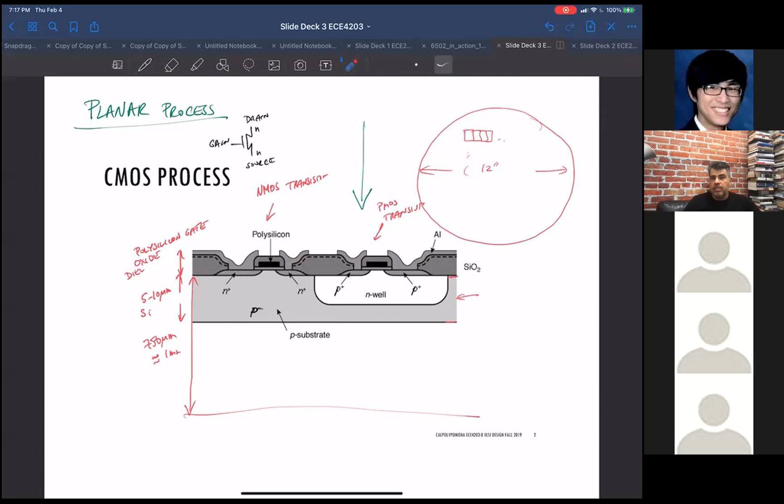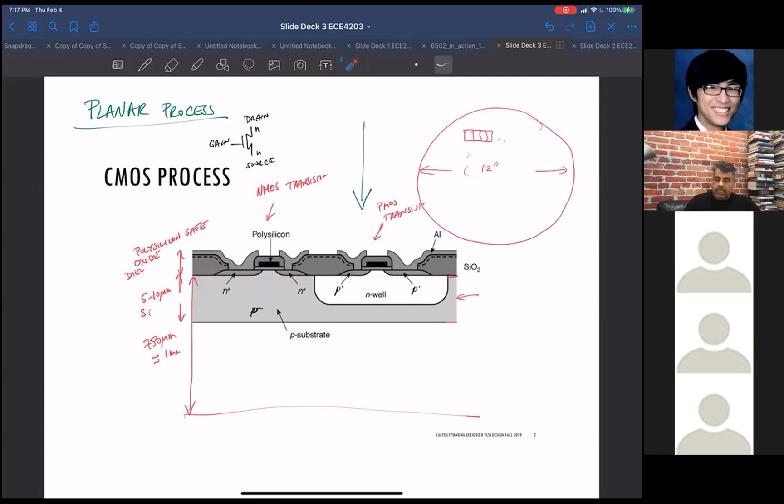Anything above the surface is almost entirely put there by deposition. You deposit a whole layer of aluminum or copper and pattern it—you deposit it, pattern it, then put a layer of dielectric above it to isolate it from the next layer of metal, and so on. So it's almost like divided in half: this is the surface, everything below is silicon, everything above is not silicon, except the gates, which are polysilicon—that's an exception. So I'm being a bit general, but everything above is basically metal interconnections and so on.

Okay, so let's talk a little bit more about this process. Maybe it's just saying the same things again—let me take a look at my notes here.

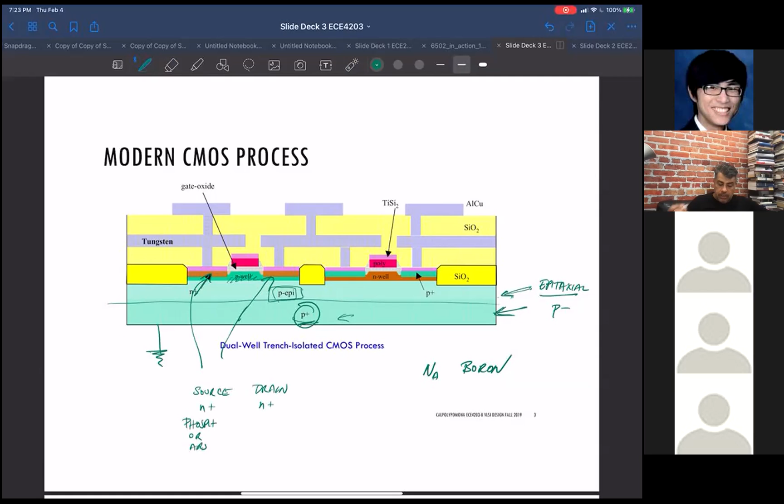So then you put in this N plus - this is not the sequence you do it in, I'm just describing the different components here. So you have your source and drain for your NMOS transistors. Again, those are N plus, which means highly doped with donors. Those tend to be phosphorus or arsenic, which is what they dope it with to get this heavy concentration of electrons.

You have a gate dielectric, which is silicon dioxide, and then you have an actual polysilicon gate. So this is your NMOSFET schematic drawing. You have your source, your drain, and your gate. This gate is polysilicon sitting above your substrate, and the source and drain are these N plus doped areas in the silicon.

So simultaneously then you're also building up P transistors, because it's a complementary MOS process. You have both N type and P type.

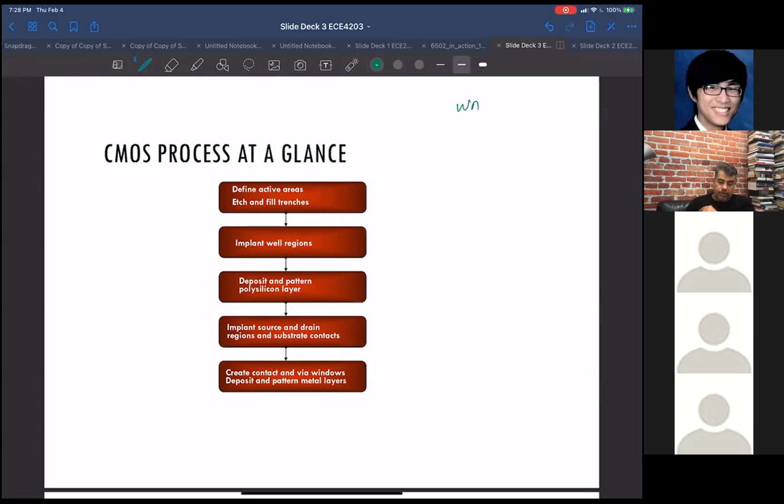And that's called a lot — a wafer lot. Depending on which foundry you're in, a lot could be 12 wafers or 24 wafers. And those wafers in that lot are all sort of traveling together, and the same thing happens to all of them. So those guys are all moving from station to station and getting worked on. By getting worked on, it's all happening automatically by these machines, and they're doing these steps to these lots, and then other lots are moving through.

So essentially, at a very high level, these are the steps that kind of happen to these wafers. The first steps happen just to the silicon itself. Remember when I was saying that when you're below the silicon surface, it all has to do with implantations.

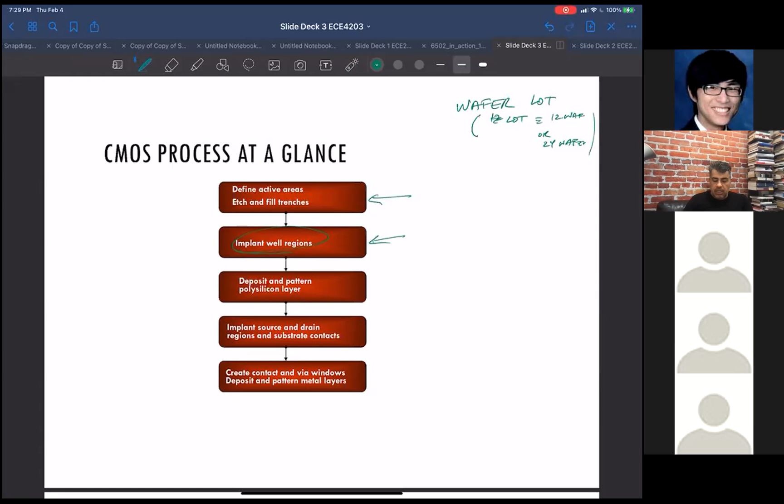So you have these implantations, which is a way of adjusting the doping concentrations, etc. One thing I should have mentioned better: because of different reasons, which we might go into, you have NMOS and PMOS in the same substrate. They are isolated from each other by the N-well of the PMOS, but for reasons we probably won't get into, you'd like additional isolation.

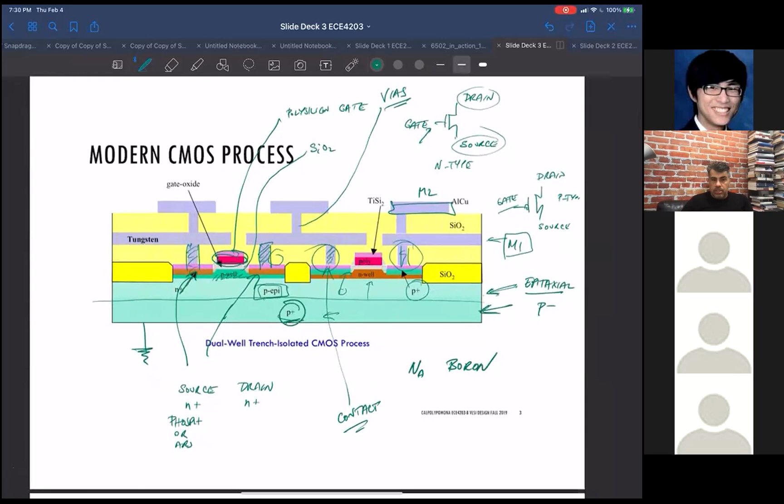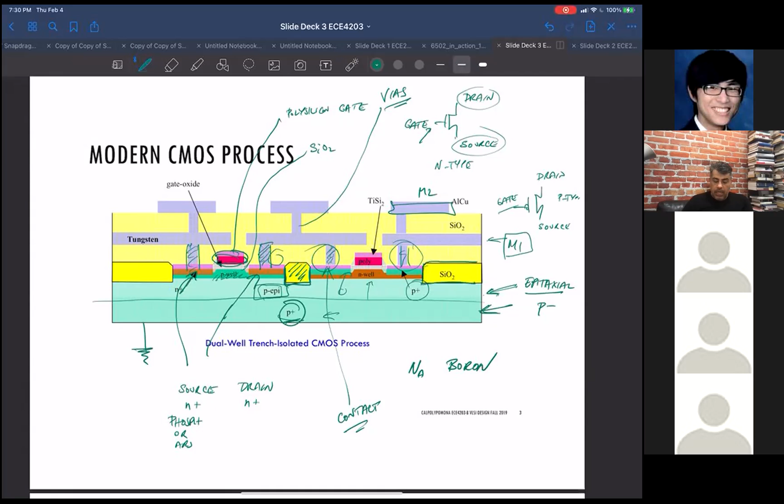So what you do is you actually etch the silicon and fill between the transistors with some dielectric, typically silicon dioxide, and that is an isolation between the transistors. So that also happens at this top part — you etch the silicon, and that isolation is called a trench. You fill it with some dielectric, probably silicon dioxide, but it could be something else.

Okay, so this is all stuff that's happening that's putting in the sources, and this is the first step — the isolation, sources and drains of the transistors, substrate contacts. So that's kind of what happens here.

The next step is you deposit and pattern the polysilicon layer. The polysilicon is the gate of your transistor — so this is your gate.

Okay, we'll see why this is the case. After you put in the gate, you will adjust the doping of your source and drain regions, and substrate contacts. After that, you put in the connection between metal layers and your sources and drains and your gate, or additional metal layers and the connection between those.

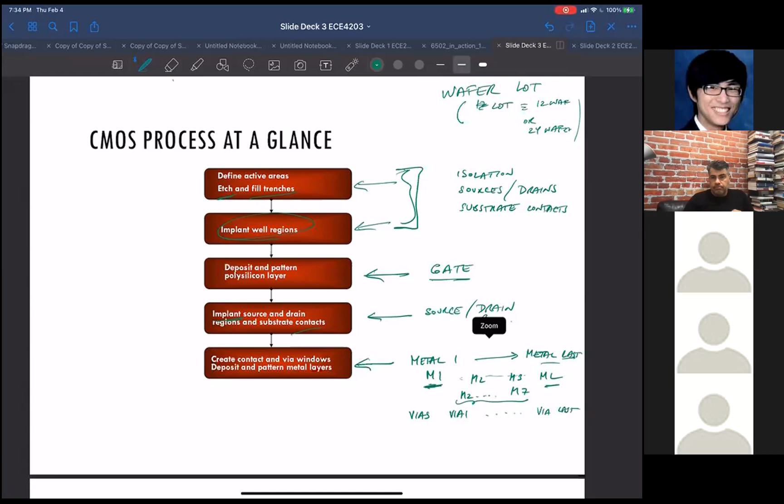Okay, so this talks about patterning. It keeps talking about patterning, because when you're depositing something on the silicon, you're depositing it the same everywhere. Once the machine is doing doping or deposition, it's doing the same thing to the whole wafer. But we actually want different parts of the wafer to be different, depending on whether we have an NMOS or PMOS transistor, or a metal of a certain shape on one side or another — that's what makes our design. So it's not just one uniform piece of N plus, P plus, metal 1, or metal 2.

So you go through this deposition or doping process, and then you go through patterning, where you're actually adjusting the shapes. Now, the only control you have is adjusting the shape of the thing from the top. When you look at the wafer, or the silicon chip, from the top, you can adjust those dimensions. If I'm looking at a piece of metal from the top, it'll look like this, say. I can maybe make it wider, I can make it longer. But in a CMOS process, I cannot change its thickness.

That's set by the process. So all I can do is play with the geometry in the plane of the silicon. I can make the width and length of a metal layer wider or longer, pretty much as I want within some design rules which we'll see, but I cannot adjust the thickness.

They will not let you do that. You cannot adjust — well, you can adjust how big this drain region is going to be, or the source region, or what this gate is going to be, but you cannot adjust the doping concentration. That's set by the process. You cannot adjust how deep this doping will go — that's also set by the process.

You can adjust where this contact will go. You can put it wherever you want within the design rules, but you cannot modify the shape of that contact, or how thick it is, or anything like that. So all you're basically giving the foundry is these drawings, but it's only the geometry you can modify, as a two-dimensional geometry for each layer. Any questions about that?

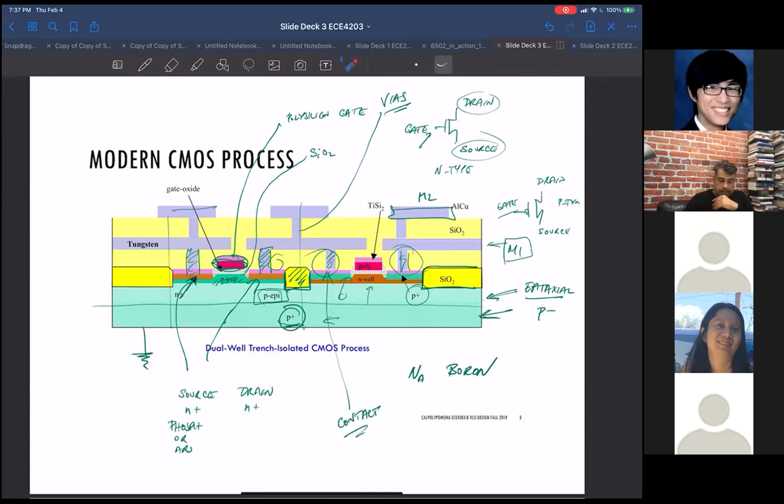That's, by the way guys, I think just as an aside, the last couple of semesters we've been kind of screwed because of various reasons. Once we're not on campus, we don't have access to these computer-aided design tools, and those are very important for doing VLSI design. Like I mentioned, Dr. Olson and myself are trying to somehow get those moved into a way where you can have access to them from off campus, but there's all these issues we're trying to sort out. I don't know if it's going to happen. I can't say I'm optimistic.

So without those computer-aided design tools, it's especially hard. The part that's really hard to visualize is this physical implementation of these layers. We can draw these drawings all we want, but besides using the computer-aided design tools, it's a little hard to visualize.

So I apologize. Because of that, some of what I'm saying makes it hard to understand, but it is what it is.

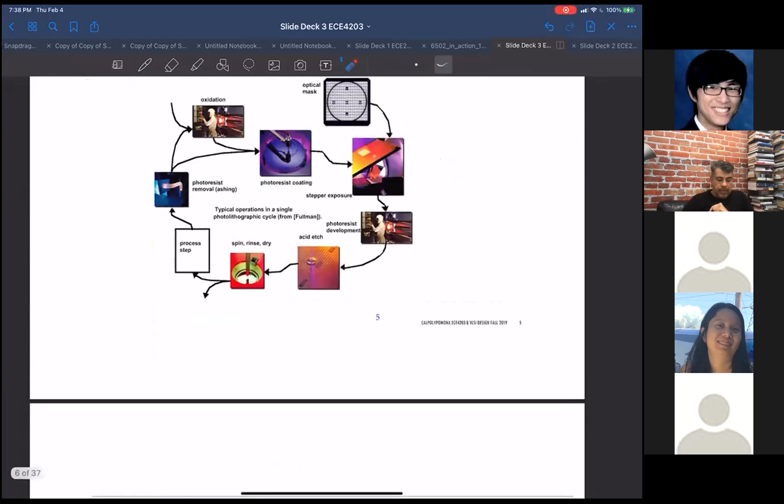So we're doing this patterning of these masks, these patterns. How does that patterning work? That patterning works with a process called photolithography. Let's say I want to shape my metal one in a specific pattern that represents a certain connectivity I want. Let me first describe it, and then we'll step through this.

The first thing you do is you spin on a material called photoresist. It's sort of gooey, liquidy material that actually gets spun on the wafer. It's very soft at this point.

It's called photoresist because if you illuminate it with specific wavelengths, the part that gets the light gets hard. So instead of being the soft, gooey, watery material, it actually gets stiff. Only the parts exposed to the light. It's also possible for it to be the opposite polarity, so the light hitting it makes it softer, but it's easier to think of it as one way: when it gets hit with light, it gets harder.

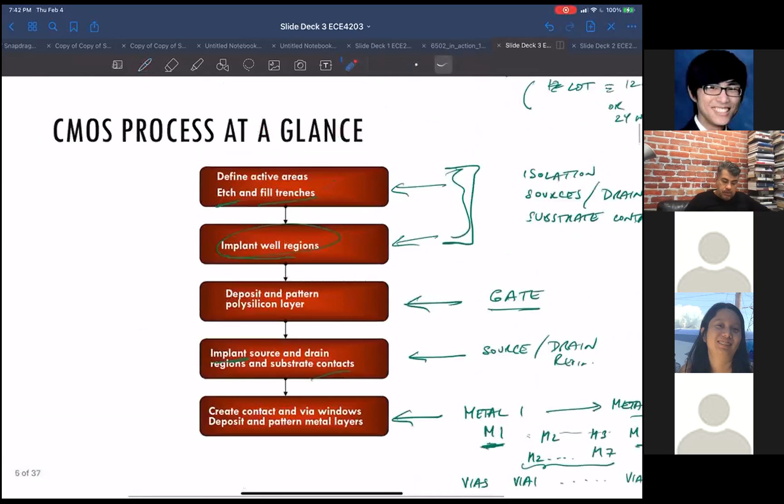Okay, let's walk through that info. I'm going to explain the same thing now with the help of this chart, which talks about a particular step in the process. Let's say we're talking about creating these oxide barriers, or isolation layers. This is done at almost the very first step.

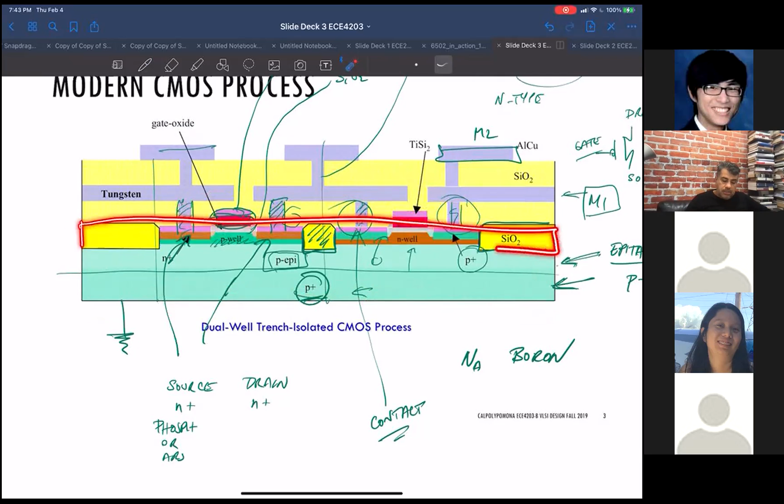What you do is, the same thing happens to everything on the wafer. Imagine at this point none of the stuff's here, you just have the silicon. The first thing you do is deposit this thick oxide everywhere. We're just going to look at that first step and see how it works. So you have silicon, and the first thing you do is deposit oxide everywhere.

Then what you'd like to do, like I mentioned, is protect some areas of this. Let's pick green for this, which is the photoresist. So I want to protect some parts of this oxide.

Okay, and then I'm going to come in and etch with something that etches silicon dioxide. I want to get rid of these areas. So after I do that, I end up with this, and this stuff goes away. Now I'm ready to move on to the next step and put the source drains of my transistors here. So that's kind of how it flows.

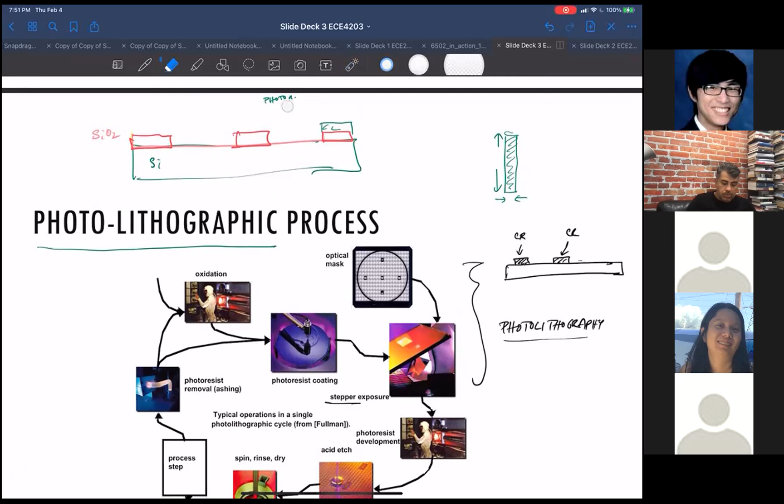Now, the photoresist was only there to help you pattern the oxide. You don't want it permanently there. So then you go through and remove this photoresist, a process called ashing, but it's photoresist removal.

And then the whole thing starts over again with the next layer. So it's: do your deposition across the whole wafer, then you spin on or put on your photoresist, you pattern the photoresist using photolithography, then you do your etching or implant or whatever you're going to do, and then you remove the residual photoresist and you repeat.

And in a modern process, that might happen like 150, 200 times, maybe more, before you get your wafer. So these steps are constantly happening, hundreds of steps, hundreds of times. Okay, so is there anything you want to say?

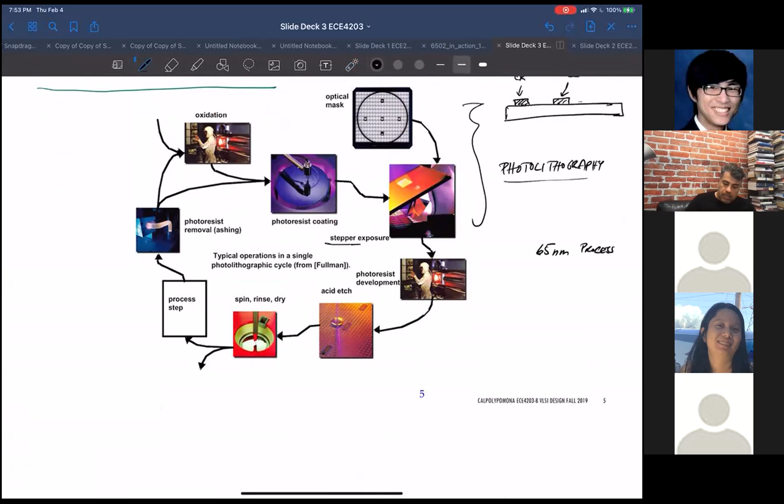Yeah, so let's talk about a typical type of process. Let's say you have a 65 nanometer process. They're all a little bit different, but the one I used recently had 50 mask layers that we drew. As designers, we drew 50 distinct layers, and we paid for 50 of these masks.

So that had, I think, about 200 steps, because sometimes they reuse the masks, since the masks are extremely expensive. You can imagine these are all fine lines in chrome glass, etc., and it has to be defect free. Otherwise, all the defects in your mask will show up on all your die—not good. So it has like 200 steps.

So anyway, the reason I was going with that is that they try to be creative with the masks. With the same mask, depending on the photoresist being positive or negative and whatever, they'll try to reuse the mask to do different things 2 or 3 times if they can. Okay, so this had—

What they told us was that in production, it's 1 to 6 days per mask layer. Because remember, all these wafers are moving around, sometimes getting held up at the lithography machine. So it's not that it takes 6 days to actually do a few of these processes.

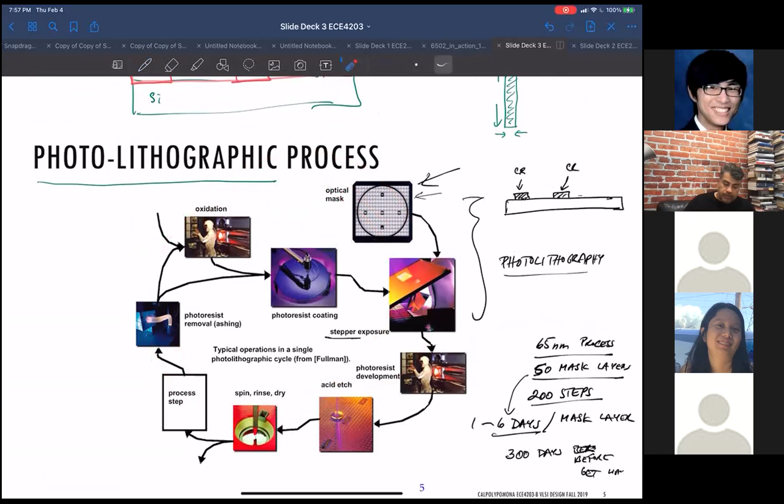Okay. What else do I want to say about this? I think that was it. So, all right, so this is this photolithography process that happens over and over and over again, and might happen 50 times. Okay, so now let's look at the entire process. Now that you know photolithography, etc., let's see what.

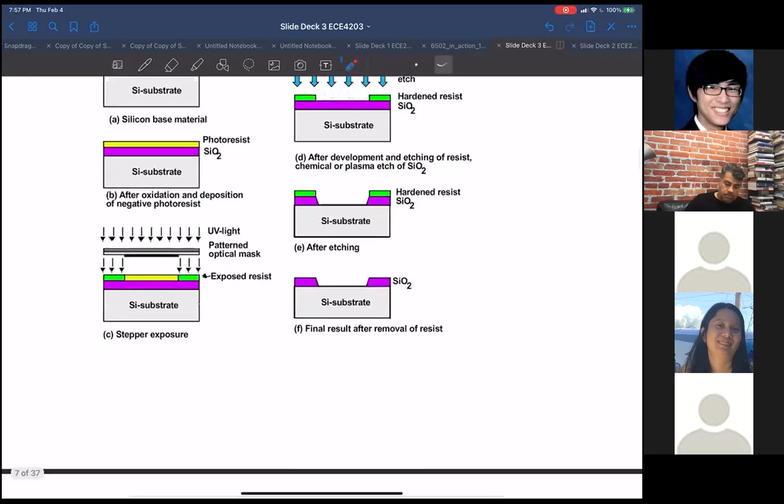Let's walk through a process. So we said we start with a P+ wafer.

The first thing they do is grow epitaxial layers on top. The P+ is for low substrate resistance, for good grounding, and the P-epi is so you can adjust transistor thresholds and so on. That's why you grow it.

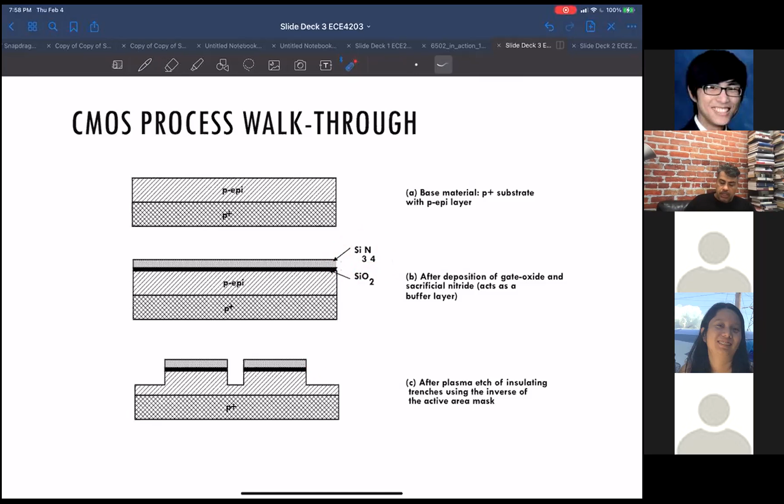The next step is you grow a thin silicon dioxide layer. Then you put a silicon nitride on, this is getting pretty specific, but in this case they're using the silicon nitride as a mask for the silicon dioxide. This is for building the trenches and the isolation.

The reason they're using silicon nitride here for a mask is that sometimes when a process step is very intense, very damaging, photoresist material, which is just set through photolithography, doesn't get hard enough to resist something that intense. A process of deeply etching silicon, doing the silicon etch, is called reactive ion etching, but it doesn't matter to you guys. It's very intense, very damaging.

So what they've done specifically is first pattern silicon nitride, which itself is harder than photoresist, and all they've used it for is as a mask. So they patterned the silicon nitride and used it as a mask to etch through the silicon.

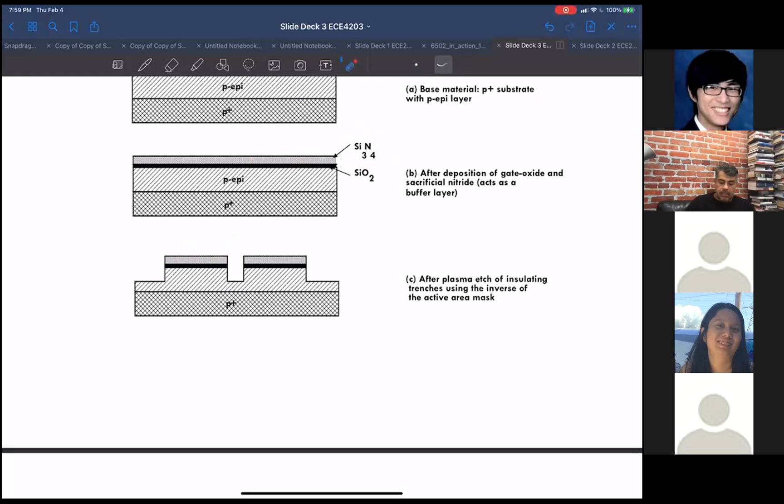After that step, they removed the nitride layer since it's just a mask, so you want to remove that. Then you basically fill those trenches with oxide. They go deep into your silicon, maybe 3, 5, 6 microns deep, to be isolation for your transistors. So you put your transistors in between these trenches that you dug and filled for isolation.

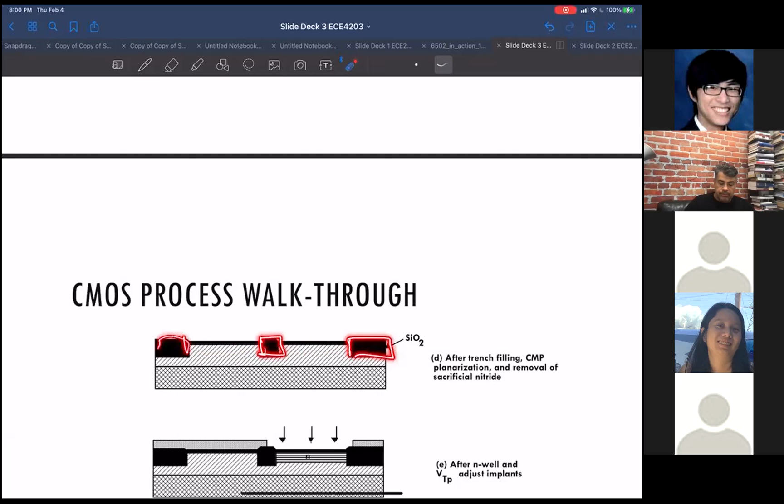After that, you cover where you want your NMOSFETs, and you implant your N well for your PMOS, and put in what's called the threshold voltage adjustment for your PMOS transistors, because if you just build a PMOS transistor its threshold is going to be too low. You want to increase it a bit, so you put an extra implant to adjust that.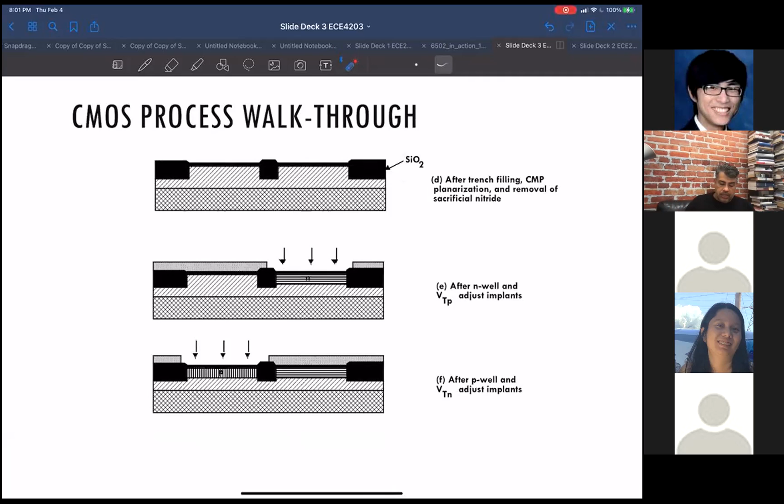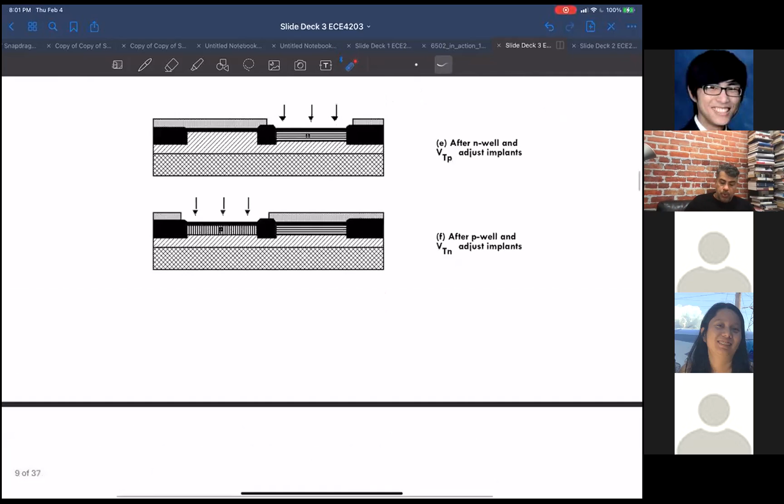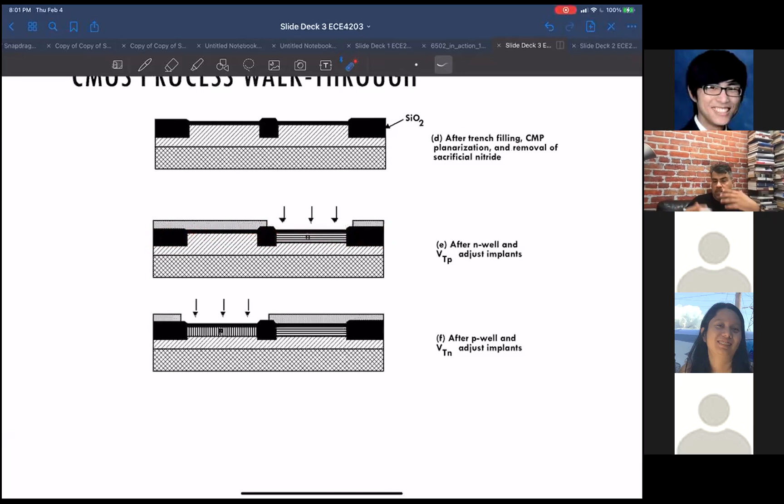Next, you cover your PMOS areas and do the same with your P well, for the N transistors. So you cover your Ps, and then you put your threshold implants for the N transistors. At this point, what have you created? You've created your isolation, your N well for your PMOS, and doped the channels for the N and P, so when you get the transistor it'll have a reasonable threshold voltage.

Next step, you deposit your polysilicon. These are the gates, so this is the gate for the NMOS, gate for the PMOS, and you etch that down to pattern it.

This is an important thing, this was a big breakthrough many years ago, it's called a self-aligned process. So when we drew the cross section for an NMOS transistor, this was the dielectric, this was the poly, this is the N plus source and drains. We drew them like these things line up precisely.

But there's nothing that says if you just did it mask after mask, there's some mismatch between the masks. However precise it is, there's no guarantee things will line up, there's always some nanometer shift. There's just some slop, even in the most precise process.

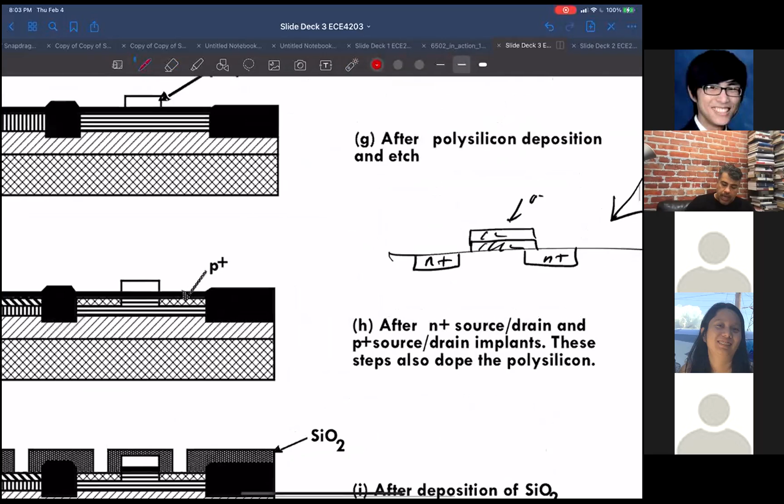So it could easily end up being... this is kind of good, but you could easily end up in a situation where you screwed things up and this is your poly, and stuff moved over a bit. So now you have a gap between, say, the source and the drain and your gate. This is an extremely unfortunate situation, because it means your transistor isn't going to turn on, because there's no channel here, the gate can't put a channel there.

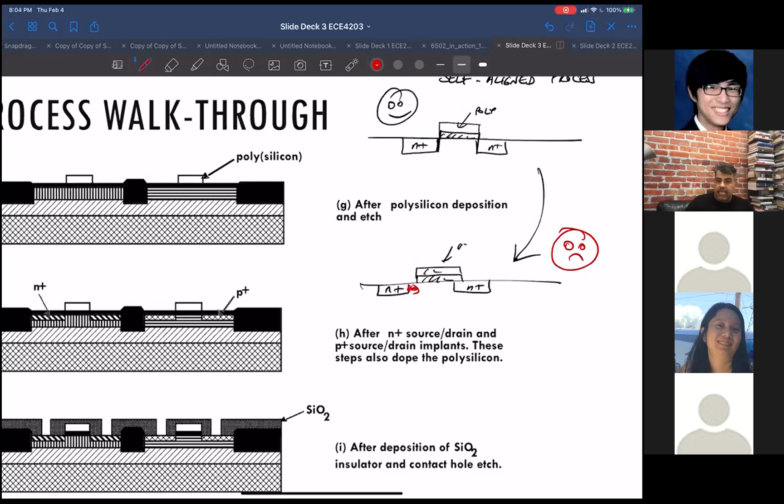So what they did was they said, okay, how can we make this perfect every time? Regardless of alignment, manufacturing tolerances, whatever, how can we line this up? I don't know who was the genius that came up with the self-aligned process, which is that you actually dope the N plus and P plus sources and drains using the polysilicon as the mask. That's why you deposit the polysilicon first, then do ion implant on the whole thing. The polysilicon gate stops the ions from going there, and wherever it's not, you get N plus. So your sources and drains become self-aligned with the poly, regardless of alignment accuracy.

That's why you do your N source drain implants after you do your polysilicon gate deposition.

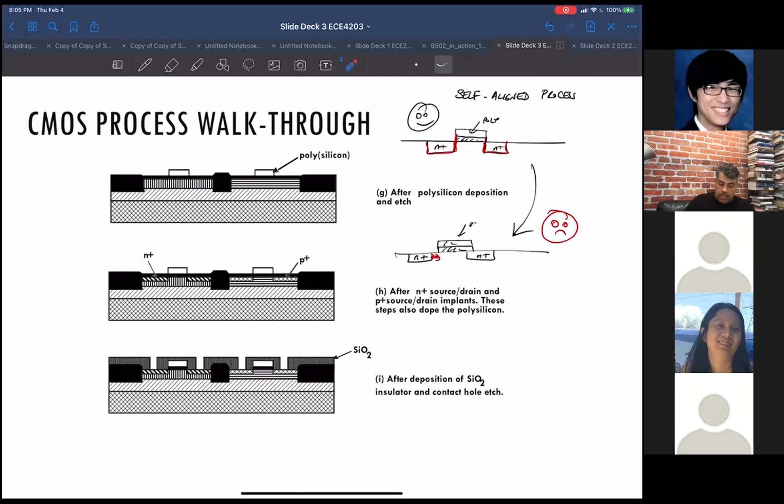So the next step, after you're done with everything underneath the silicon surface—the only thing you did over the silicon surface was the polysilicon—now you start putting in stuff for your metal layers. You start putting in this oxide layer as your dielectric, so when you put your metal, it won't short to your gates except where you want it to. That's the first step: silicon dioxide deposition.

After that, you put your metal 1, the first layer of aluminum or copper. Copper is slightly different, so this is describing aluminum, but it's similar. Then you etch where the metal 1 is.

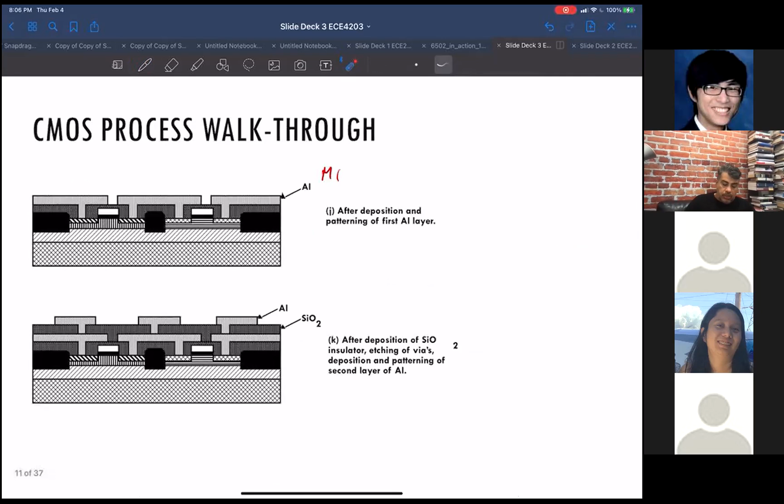Then you put another oxide layer between metal 1 and metal 2, and then you deposit your metal 2. Previous to that, you've also defined where metal 2 connects to metal 1, which is also etched in. That gets deposited, and you build up all your metal layers, and then you're done. That's kind of the step-by-step process: first you build up your transistors, and then you start building up everything on top of that.

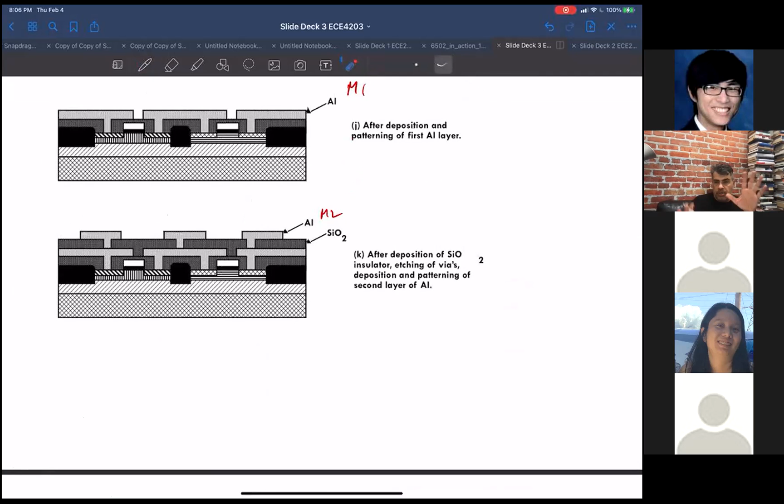This is probably very difficult to follow, but I hope it gave you guys an idea. For whatever it's worth, this is a 3D perspective of MOS transistors, kind of what you might end up with.

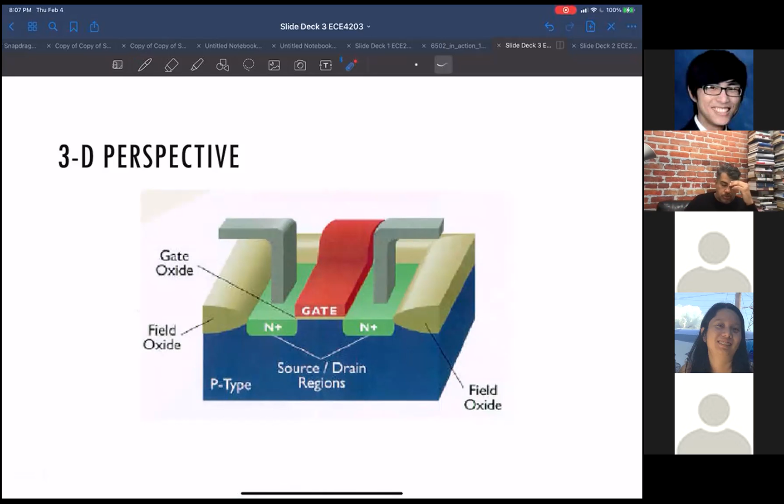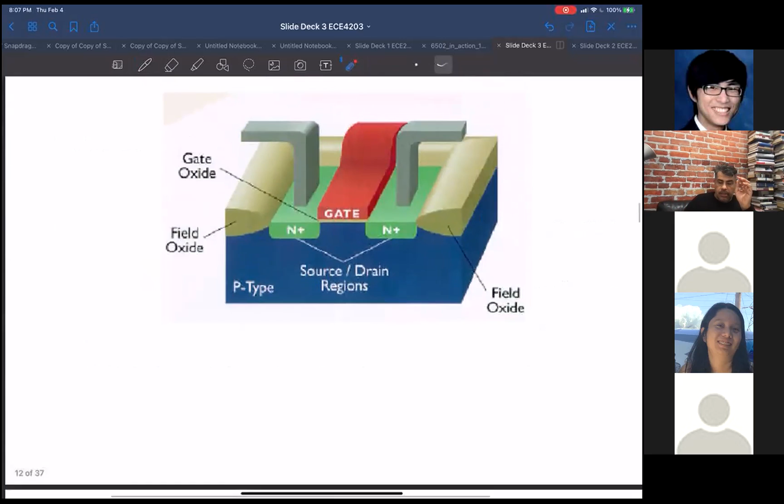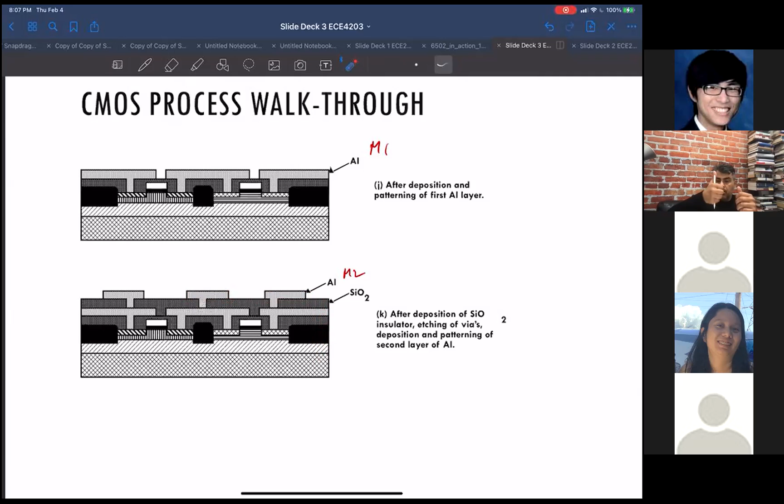So how does this look when you, as a designer, are designing these masks for the foundry? You never see things unless something bad happened—you never actually look at or touch this cross section when you're doing design, because you have no control over these thicknesses. It's just important for you to know what's going on, but you can't adjust anything here. You can only adjust these shapes, not in the Z direction out of the wafer, but in the X and Y direction across the wafer.

Let's see what it looks like if you're going to make a transistor. First, you need to define where your N-well is—wherever there's an N-well is the PMOS transistors. So in your computer-aided design tool, or mask layer, you'll just have a rectangular drawing where the PMOS transistors are going to be.